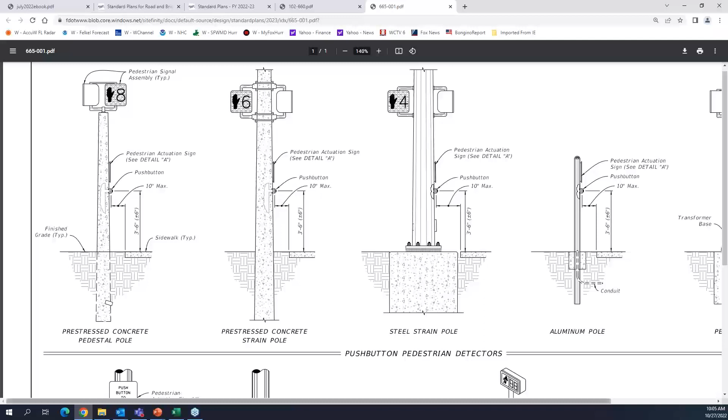It's a wiggle room. So with that, if you have buttons placed on the same pole, that plus or minus 6 inch allowable tolerance will enable you to shift the buttons vertically relative to each other and still stay within that compliant range. That's what I've been told by the standard plans folks has been determined to be the best solution for buttons on the same pole — by shifting them vertically relative to each other, there shouldn't be any conflicts with the wiring inside the pole or with the actual button equipment itself. So hopefully that answers the question there.

So Brad, we did have a question come in kind of related to that. I just wanted to throw it in here. Wanting to know, can you discuss the maximum distance from the push button to the crosswalk on a corner and at a mid-block crossing?

That's actually a good question, and the answer is one I'm not completely familiar with. My first response would be to refer to the FDOT's TEM, the Traffic Engineering Manual. Then I'd suggest looking at standard plans, as they provide some limited guidance. But I think the governing document is probably the MUTCD. There is specific dimensional guidance and requirements in the MUTCD for where the button needs to be placed relative to the ramp. Not being familiar with that, I don't want to speculate on what that value should be.

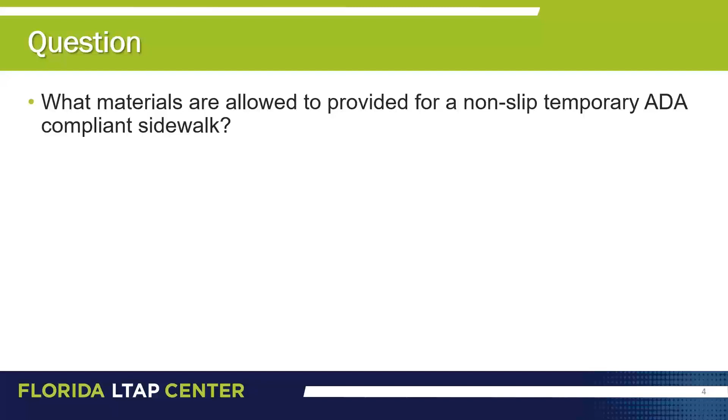Next question: traffic control plans often include temporary curb ramps. Has the department any items for the APL or specifications to standardize? Unfortunately for this one, I think the answer is no. We don't currently have any attempt to standardize their use. That's unfortunate, but maybe it's an opportunity for the design community to utilize some innovative products and provide some innovative solutions. At the end of the day, the temporary facility must be compliant with the accessibility criteria for widths, slopes, ramps, and so forth. So not having a standardized product available on the APL, to use Kerry's phrase again, just makes the sky the limit as far as what can be utilized. But it must remain compliant with the ADA criteria.

Kerry, do you have anything to add there? Brad, I wanted to go back just real quick. I pulled up the MUTCD reference on the location or distance of the ped buttons from the curb ramp. It's 4E.08, and it's between 1.5 and 6 feet from the edge of curb, shoulder, or pavement, with, of course, the push button being parallel to the path of travel. I hope that answers the question.

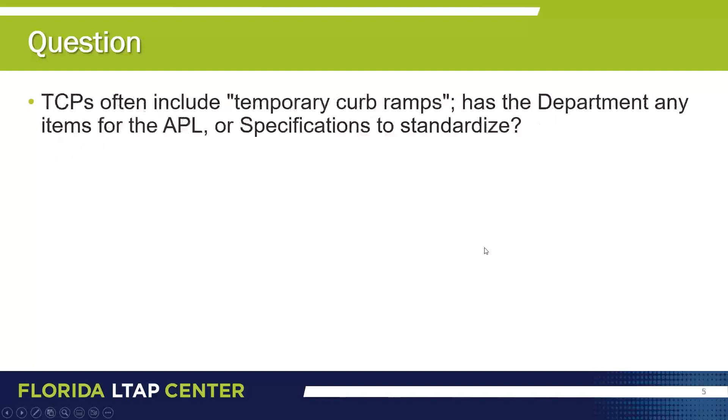Before you move on, there was another question: are there any ADA requirements for the maximum distance to the push button from the crosswalk?

Carrie, do you still have the MUTCD open? I do. It looks like MUTCD section 4E.08 lists between 1.5 and 6 feet from the edge of the curb, shoulder, or pavement.

When I've gone around the state and visited all 8 districts in Florida this year to give in-person live training, I communicate the idea—it's kind of a new idea for designers—to think about a pedestrian as a design vehicle, and then think of that pedestrian who has a visual disability, or an auditory disability, and think about how that design vehicle would safely navigate the pedestrian facility being provided, because we cannot discriminate against someone who has a disability. That's the whole purpose of the ADA.

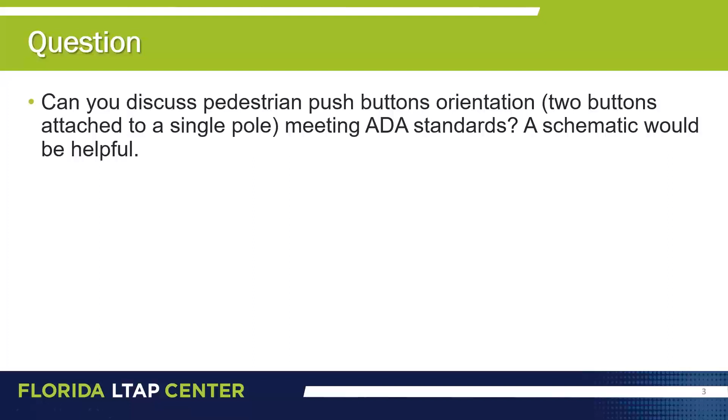Okay, hearing no more follow-ups on that topic, we'll go to the next question. Has anyone implemented audible notifications in pedestrian maintenance of traffic, or what we call now TTC, temporary traffic control? How do you address advanced sidewalk closure for blind pedestrians?

This is a really good question, and actually we just received this specific question from one of our local agencies in District 6. Currently, the DOT APL does not have any of the audible notification equipment available, which while it presents a challenge, it also presents an opportunity for the design community to work with the district project manager in construction to see if one of the vendor products that you're able to locate might be appropriate for use.

Title II of the ADA requires effective communication with all our users, including those who have a disability. So if we're going to have a sidewalk closure along an urban area block, but the actual closure occurs at the far end from which a person is traveling, then advance notice of that closure would definitely be an opportunity to take advantage of some of these audible notification products that are available. I do know that our construction office is currently looking into this, but as of yet, we haven't settled on a particular product or grouping of products to include on the APL.

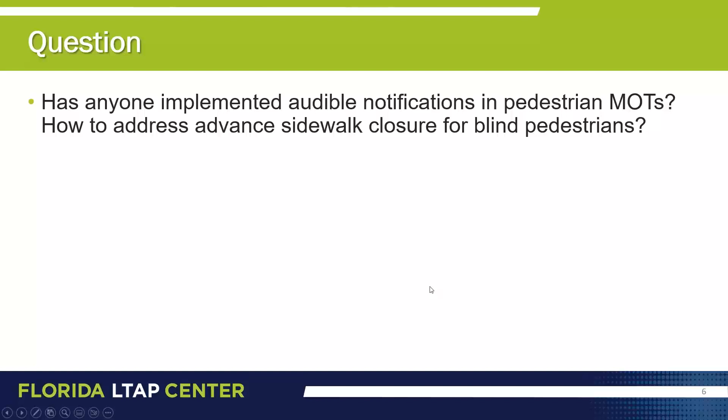Those are the only questions that we received, right, Kristen, for the registration of this office hours time? Yeah, so those were the questions that we received in advance from folks that registered for today. And because we have so much time, we wanted to go ahead and put in questions that we received in August. But the questions from you that are here today, right now, coming into the chat, are definitely going to take priority. And Brad, we do have a couple of these.

Okay, yeah, so the first one is saying, could you please discuss ADA compliant crossings at railroads? That's a good question. The FDM Chapter 222, I can't remember the subsection, addresses railroad crossings, but there's some guidance there on the appropriate placement of detectable warning systems, or mats, the DWS, detectable warning surface.

There's guidance there as to where it should be placed when there is not a pedestrian gate being used to protect pedestrians, and when there is a pedestrian gate. It's basically the distance from the gate or the railing, whichever condition you have.

Also, the MUTCD provides guidance, and it may be addressed also in the DOT's traffic engineering manual, the TEM, for the introduction of audible signals. Very similar to an APS, an accessible pedestrian signal, but it's specific for a railroad crossing.

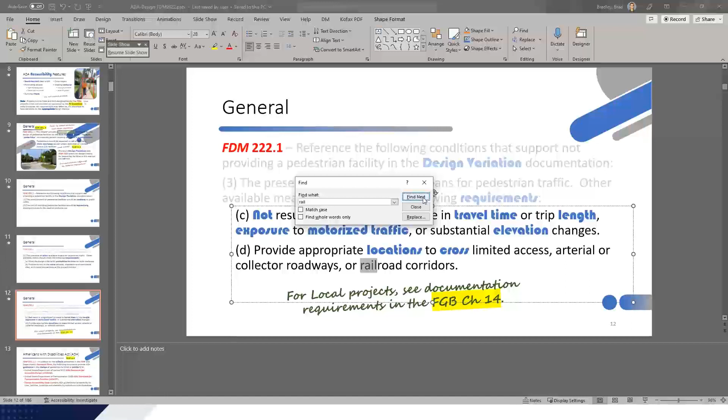Don't make your part compliant and then leave the rest of the crossing as non-compliant and then tell us, well, it's not our right of way, we can't do anything. We totally get it. We know what the expense is, and we know it's not always easy to work with our rail partners, but please give us a holler and let us know if you're really having that problem.

I feel strongly that we're never going to achieve vision zero if we don't go a little bit beyond what our minimum responsibilities are. And I think in this case, working with the railroads is going to be very important. But Brad and I are willing to help you. There's a terrific rail safety office at FDOT that has good relationships with all the rail entities. And I've got contacts at the Federal Railroad Administration. If things get really bad, we'll go to them and say, hey, we need help.

This is a good opportunity to emphasize again the marriage between safety and accessibility, because this is a potentially dangerous situation for both vehicles and pedestrians, especially as we have trains that are looking at using higher speeds up to 110 miles per hour.

That's very fast. I was in Miami a month or two ago, and I got stopped at one of these rail crossings, and the train was coming, and I was expecting it to be traveling relatively slowly. It came through - it was like four or five cars. It was a Brightline, and it was through the intersection before I could blink twice. It was moving very quickly. And they're quiet - the equipment is much quieter than what we're used to growing up in the South and hearing the train. This is fast, quiet equipment.

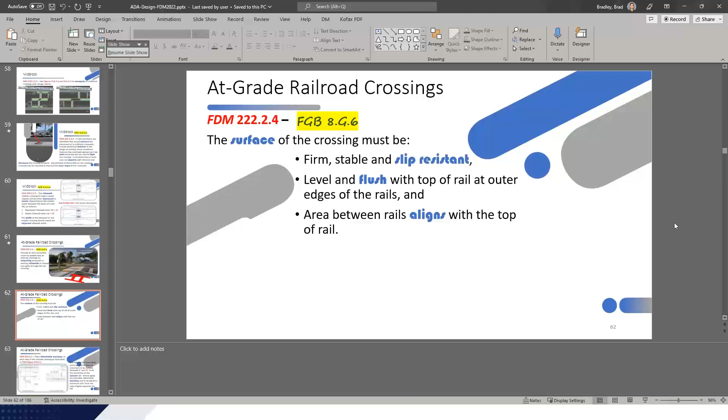Also want to make sure that - and this almost goes without saying if we're talking about changes in level being limited to 1/4 of an inch - the walking surface leading to the rail and in between the rails must align with the top of the rails. Otherwise, you're going to impose a change in level.

There's also information there. Let's see, I'm just scanning through. Okay, I'm getting ahead of myself.

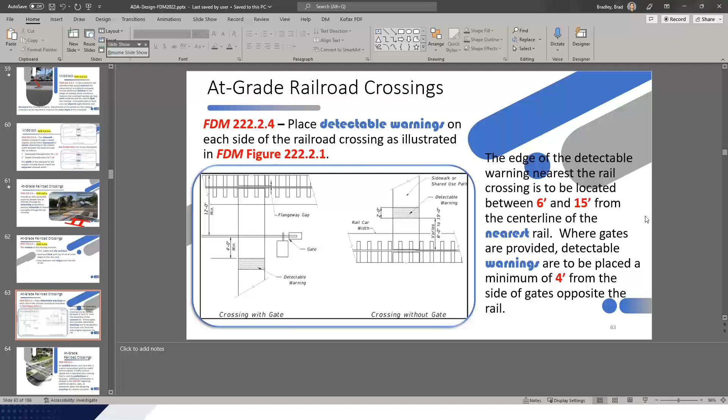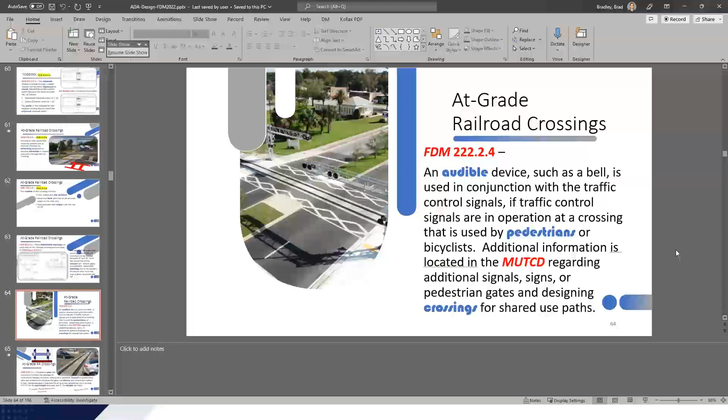On the next slide, it talks about the addition of MUTCD specified audible signals. I would also urge you to check out the DOT's TEM. I don't know if there's anything there regarding audible signals for railroads, but if the DOT wants to expand upon what the MUTCD requires, that's probably where you'd find that information.

This slide shows a railroad crossing of the roadway, with a couple of vehicles traversing across the railroad. Emphasized by this photo is the flangeway gap that is necessary on the inside of each of the rails.

That flangeway gap is necessary for the train to be able to operate through that crossing. There's a little screenshot of a train axle with the two wheels, showing that the wheel has a flange on the inside of the rail, and that flange is there for horizontal placekeeping. So that flange requires a horizontal opening be placed in the crossing.

That flangeway gap is limited to a 2.5 inch horizontal opening for non-freight rail and 3 inches for freight rail track. So ideally you'd want your pedestrian facility to cross the track at a 90-degree angle, perfectly perpendicular to the railroad tracks, which benefits not only pedestrians with disabilities using wheelchairs, but also bikers, making sure those narrow tired mobility devices or bicycles don't get jammed within that flangeway gap.

Okay, I think that covers everything. Carrie, can you think of anything else for the railroad crossing?

Just that we've been seeing more of those rubberized flangeways, and more concrete rather than that old beat up asphalt between the rails. So things are getting better than they've been.

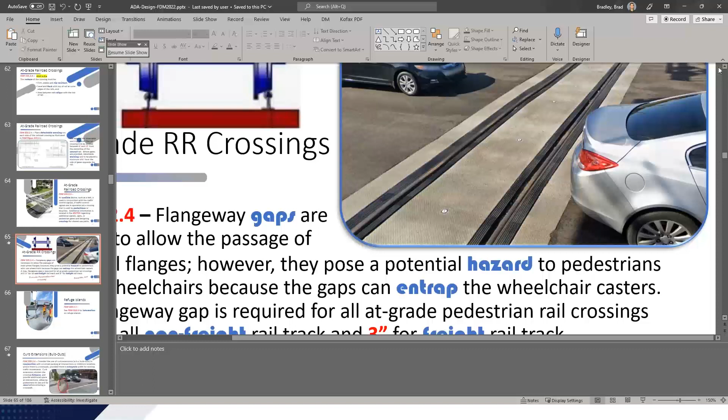But I think sometimes it does take working with the rail company. I know this is an old example, but the city of Tallahassee routed a sidewalk into a roadway because they simply couldn't get CSX to assist. We had to go back and say, this is illegal, you're going to get someone killed, let's work with the rail company. So sometimes it takes reaching out to your partners to make that ideal solution happen.

Sure, sure. All right, thank you, Carrie.

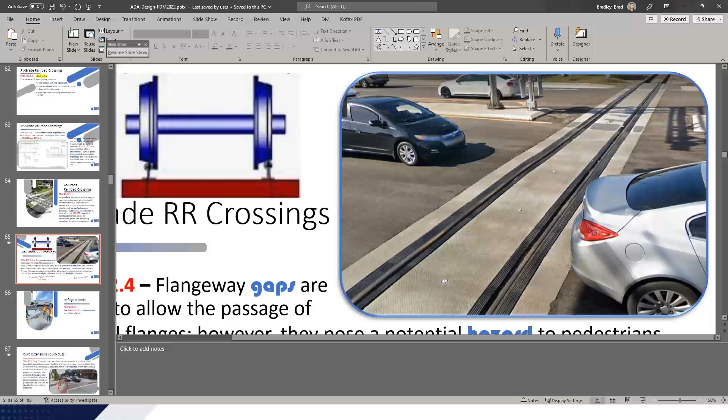So I have a question on slide 62. Someone's asking, what is the difference between aligned and flush? I think it's just different words meaning pretty much the same thing. The idea is that the walking surface remains smooth, with no vertical changes in levels. I think it's just two different words meaning the same thing.

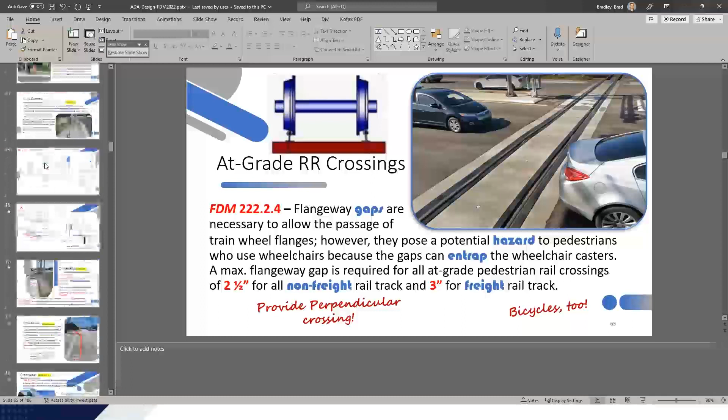Speaking of which, we actually had someone ask about slide 41, Brad, from the original presentation. On that slide, it shows a skew angle of the crosswalk striping versus the truncated dome pad, and they want to know if that should be realigned.

That's actually a common question, about the alignment of the truncated dome pattern with the direction of the crossing. I think it stems from a misunderstanding going back to when the truncated dome pattern was first released. But to clear up any misunderstanding, the dome pattern is not required to align perfectly with the direction of the crossing, although that is a best practice. Don't get me wrong, if it's possible to align the truncated dome pattern perfectly with the direction of the crossing, then do it—that is definitely a best practice.

DOT only requires it to be perfectly aligned when the detectable warning surface is on a longitudinal slope of 5% or greater—essentially a ramp, a curb ramp. In this case, I don't know what the longitudinal slope of that ramp is. This is Cascades Park in Tallahassee, right in front of the DOT central office building. So if that ramp is 5% or greater, then the dome alignment would be required.

In a related question, not necessarily to this picture, should the grade break on a sidewalk occur before or after the truncated dome surface? And if it's after, can the warning surface have a slope of 12 to 1? Is that correct?

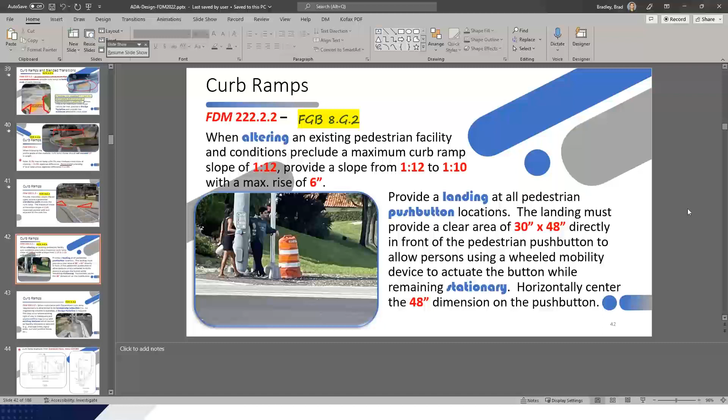So the idea is that the ADA Title II regulations require state and local governments to have effective communication with persons with disabilities, and it must be as effective as it is with all of our users or customers. In my view, the as-built condition here is not providing effective communication so that the crossing can be as safe and accessible as possible. But the way I've drawn it in here, I think would be a very simple fix for that condition. Thanks, Brad.

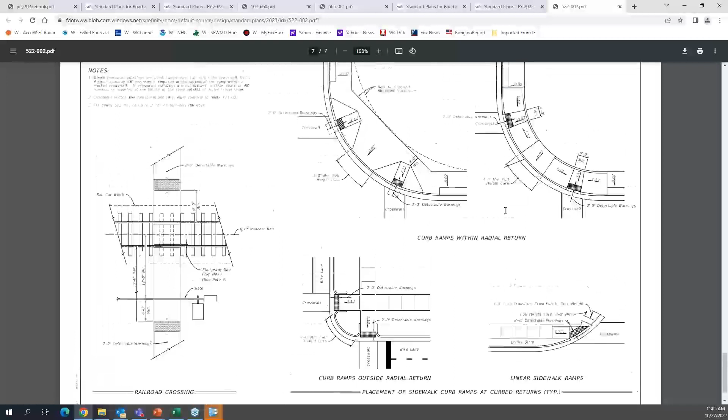Okay, so what was the question? Which figure are they questioning? Oh, I'm sorry, how does one line up a crossing with the dual ramps?

I guess maybe they're talking about these curb ramps with radial return, aligning the crossing with the direction of the ramps. This is where there is an opportunity, certainly, for an innovative approach.

I mentioned earlier a way to shorten the crossing distance is to scoot or push the crossing further back from the intersection, and in this case, I think an approach that should be looked at. It may impact other issues such as drainage and again the signalization distance and so forth, stop bar location.

But if you can push these ramps into the tangent of the curb line, then you're going to have that perpendicular joint at the bottom of the ramp. It's going to be perpendicular with the interface to the roadway, and then the crossing is going to be the shortest possible, pushed that distance back from the crossing.

Now, what's on the screen? Obviously, this is standard plan. So if this is what your design has, then it's technically compliant with DOT. But what we're asking is for the engineer of record to go beyond, I think what Carrie said, go beyond the minimums and see if there's a better solution that we can provide that would make the crossing and the ped facility in general that much more safe and accessible for all users.

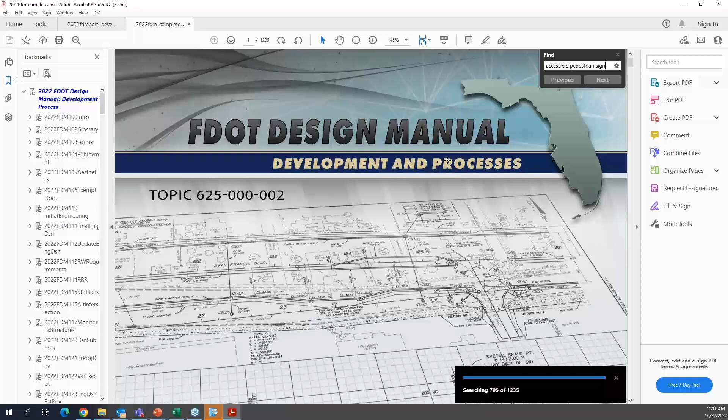But essentially, when we have a new construction or reconstruction roadway project that goes through - here it is - it says where pedestrian facilities are provided, include provisions, for example conduit, conductors, signal cables that are needed for future use of APS devices on all new and reconstructed signalized intersections and signalized mid-block crossing locations. And there's additional information here in the TEM chapter 3, section 7 for the installation and operation criteria of the APS.

So for the one who's asking that question, if these two references, the FDM chapter 232 and the TEM chapter 3.7, don't have the answer you need, please reach out to me by phone or email, and we'll find that information for you.

Thanks, Brad. Kind of related to that, is there any coordination with the Florida Division of Blind Services for identifying neighborhoods that have people with visual impairments, so they know where to incorporate these types of things into projects in that area?

That's a good question. Currently, DOT's policy, as documented in TEM chapter 3.7, is that we will provide APS upon request and the conducting of an engineering study to determine the best location and use of the APS. That's current policy, but we are actively working towards a more proactive approach to the installation of APS.

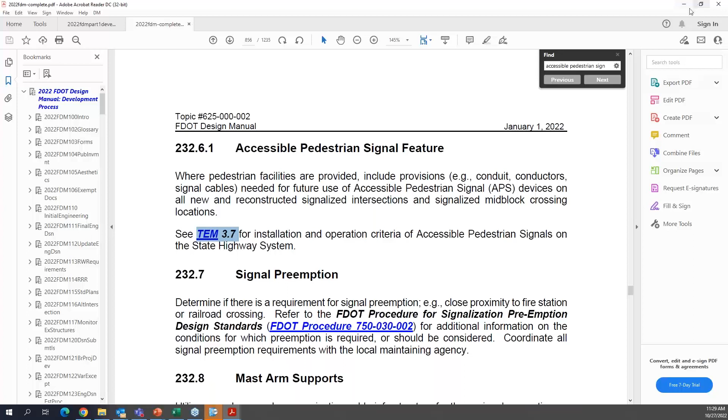I'm new on this, so I apologize for my ignorance on a lot of this stuff. But when you were talking about the pedestrian detection device, not the detection device, but the SPFs, the SPFs, and then in conjunction with the truncated domes, I was trying to understand, looking back at that example where you're talking about the DOT office that had that diagonal crosswalk that looked like it was painted over pavers, like for the impervious or pervious surface that was at a diagonal, but then the ramp was not facing, not aligned with the crosswalk.

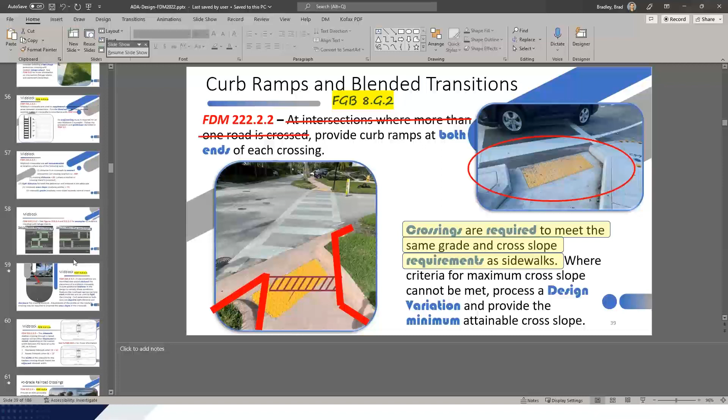So in my mind, I was thinking, well, how is the blind person to know that they have to go diagonally? And I understand now that the truncated domes, it was another one, the DOT office. You said it was somewhere up north. I think it was a DOT office. Oh, Tallahassee, I think you said. Oh yeah, the Cascades Park. So, yeah, at a park. So in conjunction with what you were talking about right now, that not all of these PSFs are to be placed everywhere, Jacqueline, what is a PSF?

The pedestrian signal feature, like for the blind person? Oh, APS, I'm sorry, I keep leaving accessible pedestrian signal out. Yes, um, it's slide 41, I think, Brad. 41, yes, I think so. Oh, thank you, there it is. Okay, thank you both.

You see you have that diagonally going, and so the truncated dome is just to alert the blind person that you need to stop, you're about to enter a dangerous intersection. But without that, how is the blind person going to know that they got to go diagonally? That's a very good question. And if you were able to see this location in person, you'll see that this is diagonal parking against the curb, and there's a two-lane roadway right behind where the picture taker is standing.

Strictly speaking, and Carrie, help me out with this, detectable warning surfaces are not necessarily appropriate within a parking lot. But again, this is not a true parking lot. This is diagonal parking against the curb, and there's a two-lane roadway right behind here. Jacqueline's got the right question, but it's not a good example for the picture because this is parking.

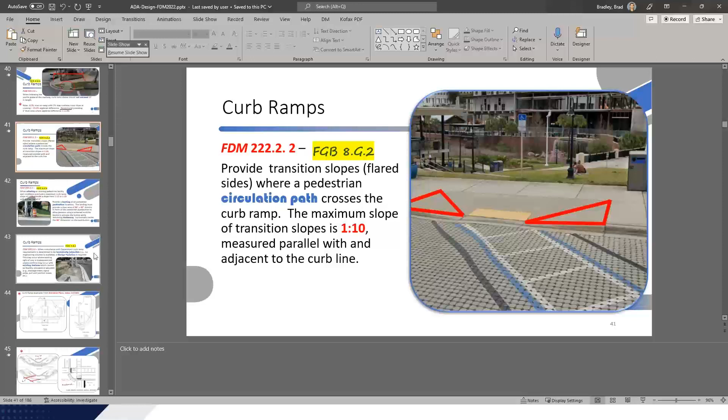Okay, thank you. Thank you, Brad and Carrie, for being here and sharing your experience. My question is to slide 73, I think it is. When you gave the presentation, you made a comment about—no, maybe it's 63—the slope of the cross path.

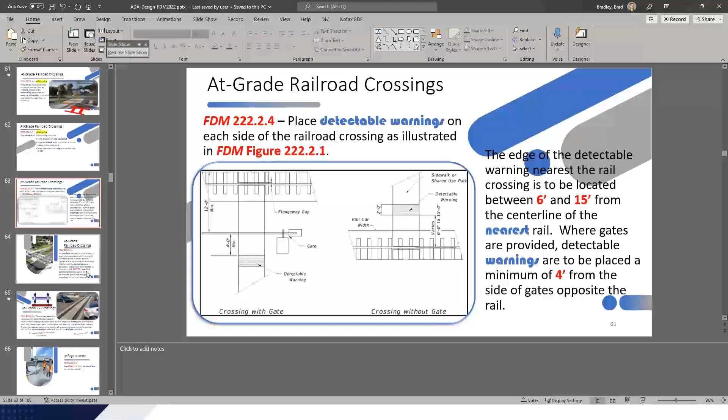Hold on, I have your presentation open on mine. It's John, what is the topic of the slide? This was maintenance, but okay. 73? Huh, that's 73, okay. Your slides don't match mine.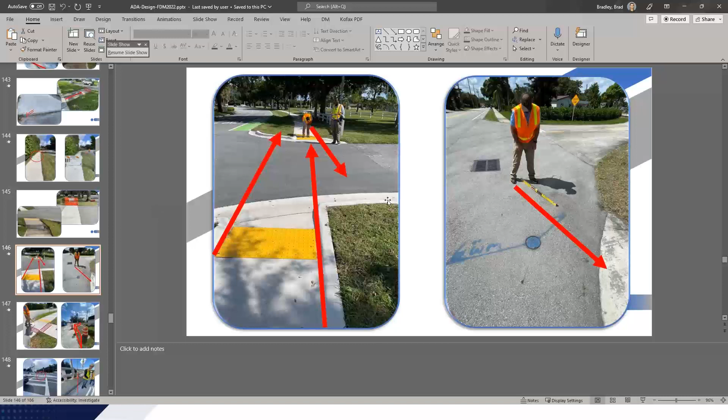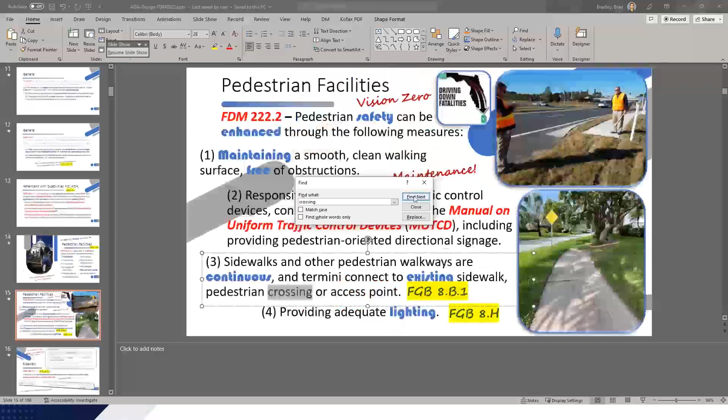Yeah, actually, let me see if I can find that language in the FDM. Bear with me a real quick second here. Hopefully I can find it real quick with this Control F. Okay, here it is, this is the page I think I was thinking of as you were speaking.

The crossings are required to meet the same grade and cross slope requirements as the sidewalk. Where that's not possible, then the DOT, as a Title II public entity as described by the ADA, is required to provide the most accessible criteria or condition that we can. But if it's not meeting the DOT criteria, then it's going to require a design variation approved by the district design engineer. Did I answer what you're getting at?

Yes, thank you. Okay, you're welcome. So just for everybody's benefit, the cross slope and grades of the roadway crossings are required by the DOT and the ADA for ADA compliance to meet the same criteria as the sidewalks themselves.

Except for running slopes, right, Brad? Well, right, if the running slope of the crossing is going to be the cross slope of the roadway that it's crossing, right? So there are some allowances there depending on whether or not you're at a signalized intersection. And Kiri, you would ask that because now I'm going to have to Control F look for something else here.

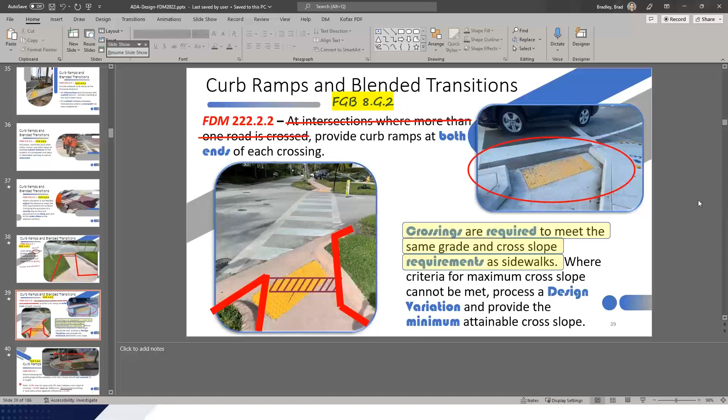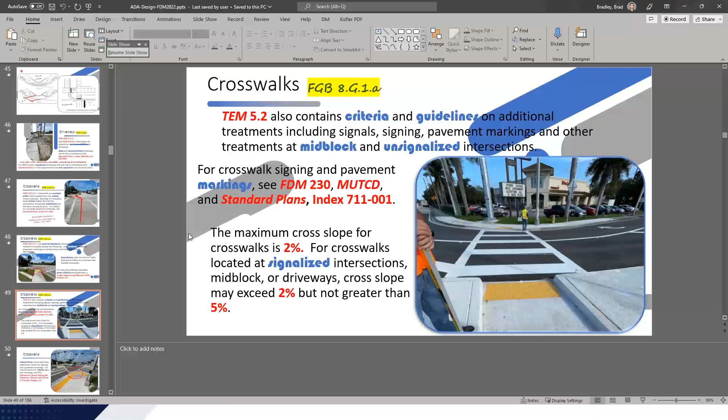Well, what I went to highlight is that the running slope used to be that of the ramp regardless, and the maximum was 8.3, but now we look at it as you can follow the existing grade of the adjacent roadway, but it has to be the adjacent roadway. It can't be like a completely separate multi-use facility, but that does make it a lot easier in places like Ocala, Mount Dora, and Tallahassee, where we simply can't keep a 5% to 8.3% running slope.

Right, so Kiri, you're talking about sidewalks that are parallel to a roadway can follow the same profile grade of that roadway. That's right, but for crossings there are a little bit more stringent requirements.

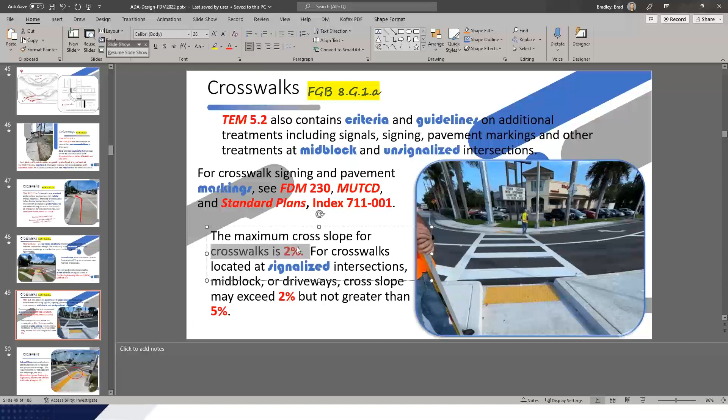And I wanted to highlight this, there's an FDM reference, from chapter 222 section 2.3, where it says the maximum cross slope for crosswalks is 2%. The only exception actually written here is crosswalks located at a signalized intersection, mid-block, or driveway - the cross slope may exceed 2% but not be greater than 5%. So you can exceed 2 up to 5 when you have a signalized intersection, mid-block, or driveway. Again, that's in the FDM chapter 222, 2.3.

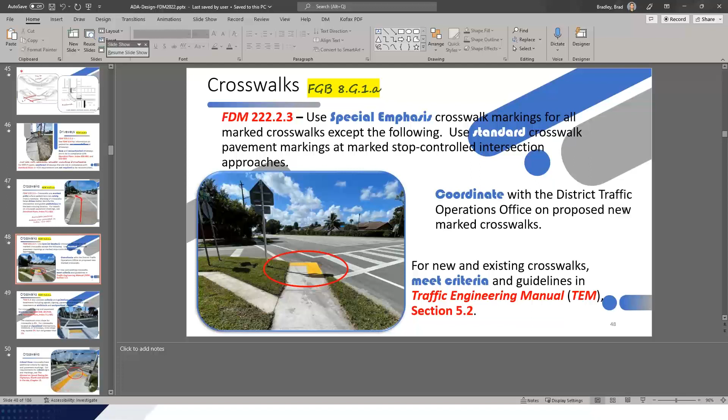All right, let's take another question from the chat. One of the challenges when milling and resurfacing is that it usually happens at night, and typically all pedestrian traffic is blocked with no detour route close by. So if there's closure to all pedestrians, how does that address or not address the ADA requirements?

I think that's something you'd ultimately want to work out with the district, because they're the ultimate authority on project-specific questions. But generally speaking, if you have an existing pedestrian facility impacted by construction, I don't know, Kiri, what do you think? Maybe if you've conducted an abbreviated study of the location, and can demonstrably show that during the hours of closure, on a typical weekday and weekend night, there is zero pedestrian traffic, then maybe you can get away without providing the temporary pedestrian diversion.

I'm just not sure about that. Well no, you've got it right. I think the standard rule is that you provide the same level of accessibility that was there before, but maybe things change in a nighttime environment where you're paving from, say, 11 p.m. to 4 a.m. You don't find it particularly safe to have pedestrians there at that time, and you can document or argue that there are other accessible routes in the area. That's one of those areas where we're not likely to question your judgment if you can document why you made the decision.

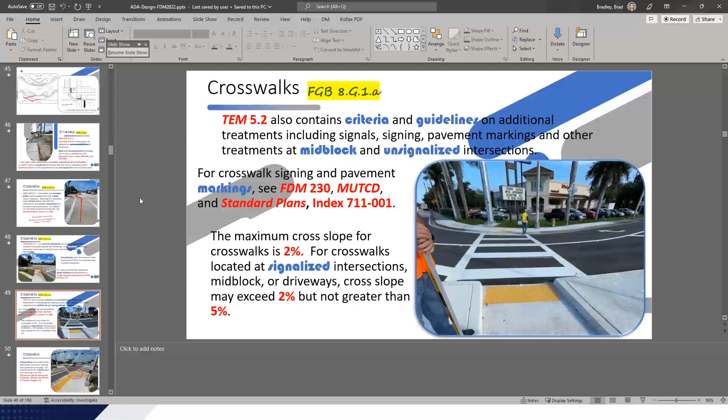So this one asks, in the case of slide 38 and the current ramp alignment, do you prefer to see a one-piece detectable warning with the domes askew to the crosswalk, or the detectable warning material cut into a few pieces in order to align the domes with the crosswalk?

I think having a whole detectable warning surface that is a whole installation is probably going to be better for the longevity of the installation, meaning there are fewer edges that can delaminate from the walking surface, and therefore you'll have less opportunity for changes in level and tripping hazards.

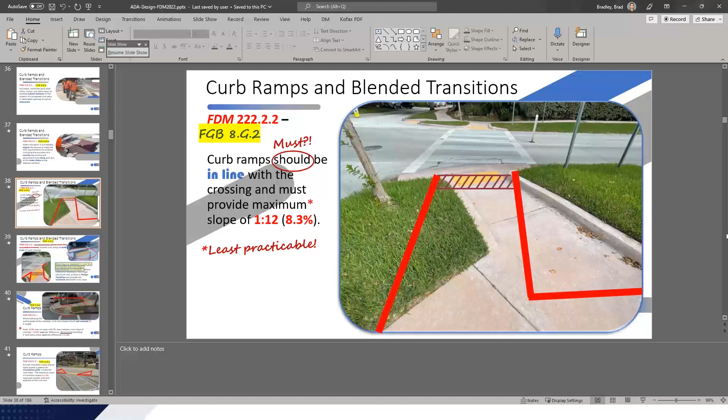I think ultimately, like I've drawn here with the red lines and the shaded area indicating a detectable warning surface, if you can adjust or tweak the geometry of the interface with the pedestrian facility and the roadway, then you can maximize the orientation of the detectable warning surface, so maybe you won't need to piece something together to make it compliant.

But again, I think the best installation is a detectable warning surface mat that's whole. But if you do have to cut it to make it compliant, there's nothing saying you can't do that—you just need to make sure the way it's done remains firm, stable, and slip resistant for its service life. I'd agree with that.

I'd only add that if you work in the LAP program, or for agencies that do a lot of LAP projects, I do a lot of inspections before final acceptance, and I pay no attention to dome alignment, none, ever. I do find that one-piece detectable warnings that are cemented in and adhered in at least two different ways—bolted and adhered, or put into the concrete—last longer, and your maintenance folks aren't going to fuss as much as when you try to piece them up.

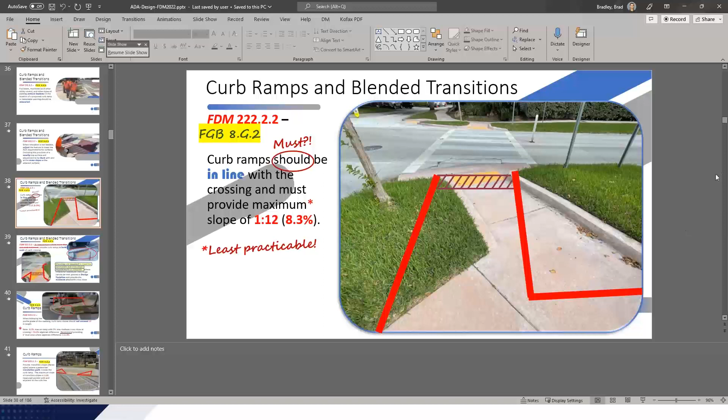Yes, it goes back to when you guys were talking about the railroad. I had issues getting on earlier this morning, but you guys were talking about the railroad crossings, and this might be more of a question to Mr. Carey because there are sidewalks out there that basically just end, right? Because we can't get across. So how would you advise us to have a more expedited process to get the railroads to work with us to get some of these sidewalk crossings through the railroad tracks? And speaking of funding, how would you advise me or any of us to try to get that done so that some of these sidewalks can be used across the railroad tracks?

Yes, this is why Brad and I still have jobs. I don't think it's a problem we're ever going to solve. But the first thing we're going to ask you to do is not to design and construct a non-compliant facility simply because you can't get the railroads to call you back. Make documented efforts to work with your railroad partner to provide a usable, firm, stable, slip-resistant surface. And when you find that isn't occurring, I hope you will call Brad or me and let us help. The FDOT Rail Safety Office maintains very good relationships with the railroads, and if we need to do a Hail Mary, we've got contacts at the Federal Railroad Administration, and we will go to them and say the railroad's getting in the way of safety and accessibility.

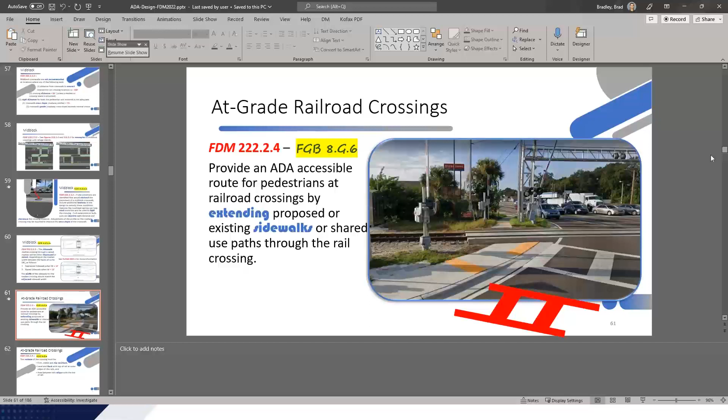We've had some real successes, but it's taken cooperation. So don't lose our number, Jacqueline, and continue to document the efforts you make to provide safe and accessible facilities. And just for those who might be interested in getting my contact information, it's up on the screen now.

Kristen, it looks like we're down to less than 5 minutes. Is there anything else that stands out at you? Well, we just have one question left, so it looks like perfect timing. Carey, there's also a question for you directly, in case you didn't see it. This last question says: is there any standards or details to address pedestrian crossing at limited access terminals where there isn't any stop control devices, or has a terminal free-flowing?

I wonder if we could get an example. While we're waiting for an example, let me say that when we talk about federal standards, the PROWAG and the ADAAG, we are not really talking about Florida. Florida has adopted its FDOT design manual as its ADA standards for state facilities, and the Green Book is the authority, the design standard, for locally owned roads. The only time we refer to PROWAG or DOJ resources is when there's something in the FDM or the Green Book that doesn't address the issue—then we will look to the federal standards. So what we're saying is, even though you can't go below the federal standards, Florida is actually holding all of our agencies, whether state-owned or local, to a much higher standard.